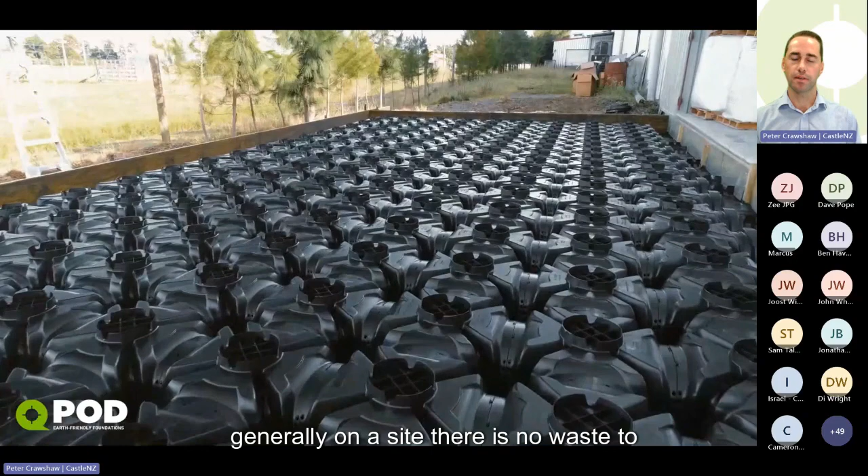So introducing QPOD, what it's all about. Essentially, it's a recycled plastic pod system, 100% recyclable, so generally on a site there is no waste to recycle. It's all components that can be reused. It's a fast install system.

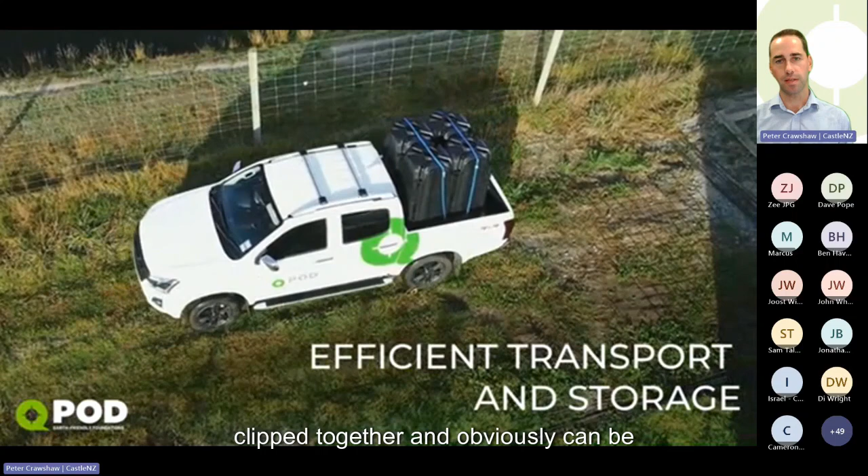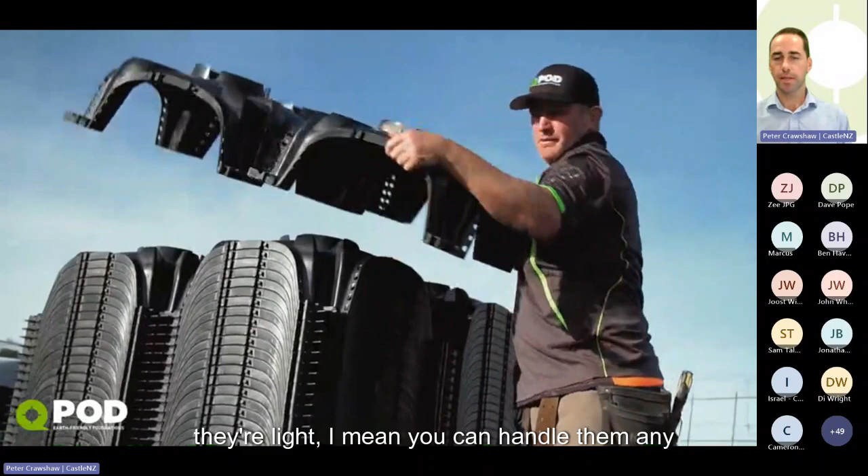It's all modular, clipped together, and can be transported on the back of a ute and trailer versus your typical truck and trailer of polystyrene pods, which is what we're really combating. They're light, you can handle them, any builders can put them down, homeowners have put these in. They come pre-assembled in a group of 4, so they pretty much mimic that of an 1100 polystyrene pod, and they just clip together in a modular lock together system.

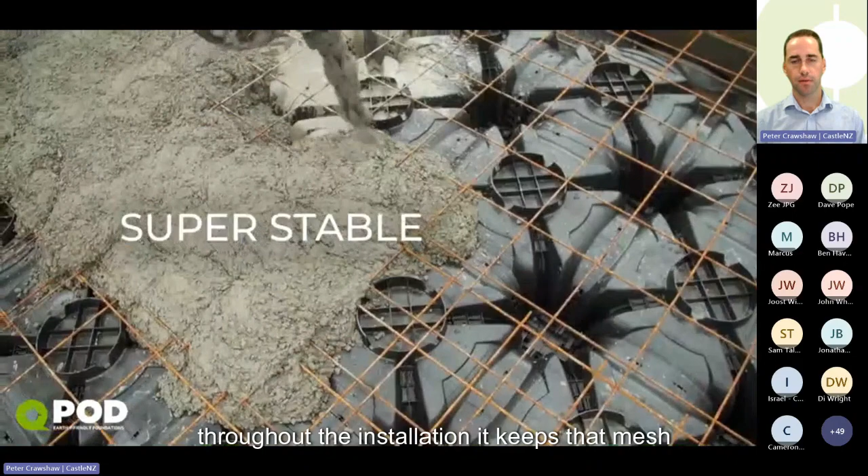Having a look at the mesh, we've got a mesh spacer built into the pod. This gives ultimate mesh placement throughout the installation, keeping that mesh at a really mint level. Essentially, you've got 4 bar chairs per pod, and the concrete pour is pretty self-explanatory.

So that's a little short overview on QPOD, what it's about, and why we're about it. Really, it's because of the polystyrene, and we want to give designers and installers an alternative. What is the problem with polystyrene? Well, the waste, and the delivery logistics, as I outlined earlier, as to the difference in logistics.

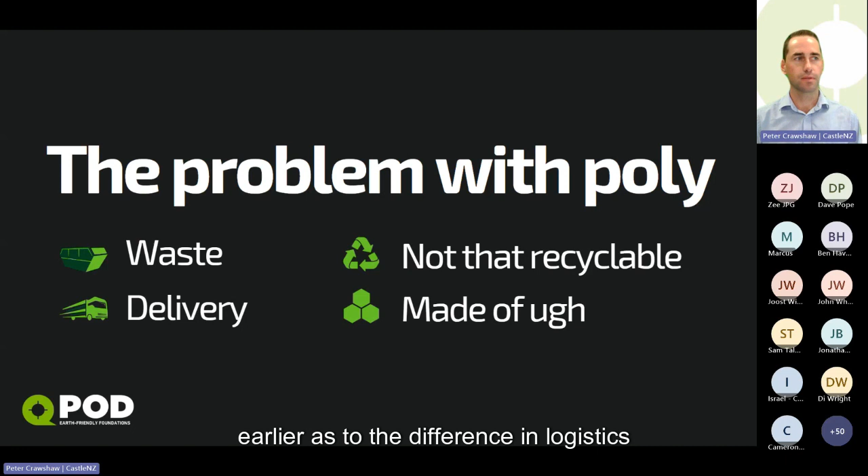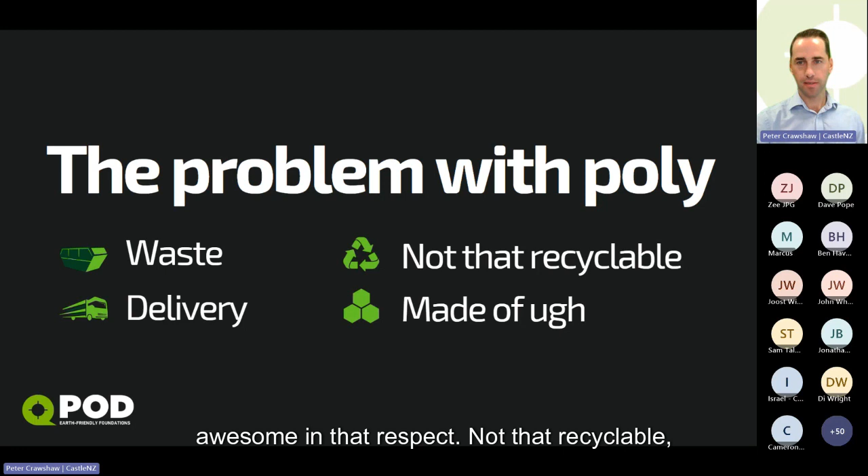You get 50 square meters of QPOD product on a pallet, so 3 or 4 pallets for a site and you're done. It's pretty awesome in that respect, not that recyclable poly. And what's it made of? That stuff that goes everywhere in the neighborhood when they're building.

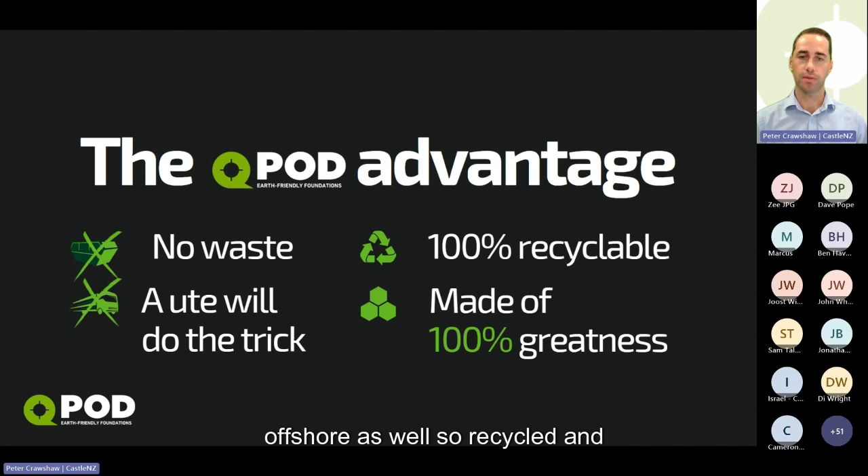We don't want it. Looking at the advantage of QPOD: no waste being a modular system, and a ute and trailer will do the trick instead of a typical truck and trailer of polystyrene pods. It's 100% recyclable and made of 100% recycled plastic as well, which we source locally here in New Zealand and some from offshore. So recycled and reprocessed, completely so.

Diving into configurations, I'll try to slow down so I'm not confusing everyone. The 2 configurations for QPOD are the raft system, which we're quite familiar with. That's typically got your ribs at 1200 centres and your mesh on top. This is the system we see around New Zealand, which swaps out the typical polystyrene pod installation we see.

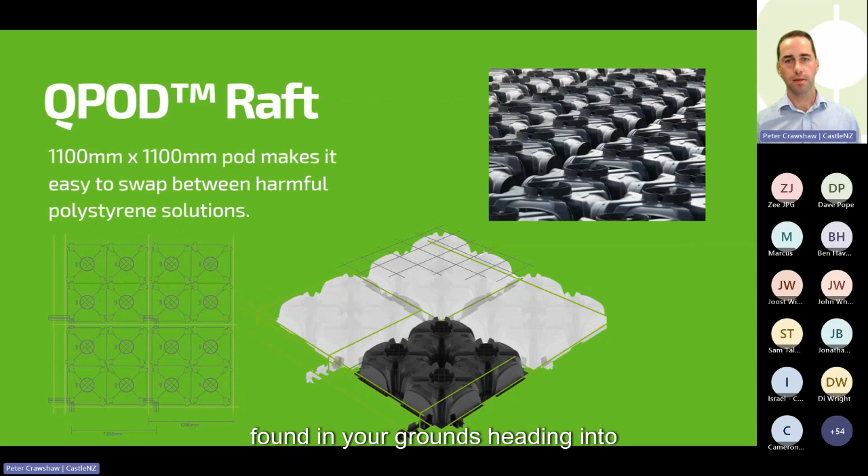The second configuration is QPOD continuous. This removes the ribs out of a raft system, and once we remove those ribs, you've got a massive saving in concrete and steel usages. So continuous performs on good ground essentially, or down to 200 kPa. It doesn't have the extensive performance of a raft slab, which is more typically found in your grounds heading into liquefaction or expansive grounds.

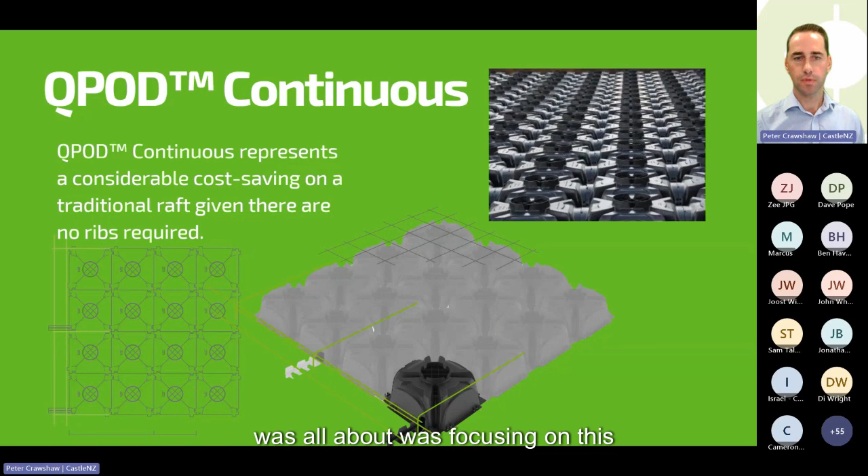So we talk more today about the continuous because that's really what the CodeMark was all about, focusing on this continuous system, which is a new one for us.

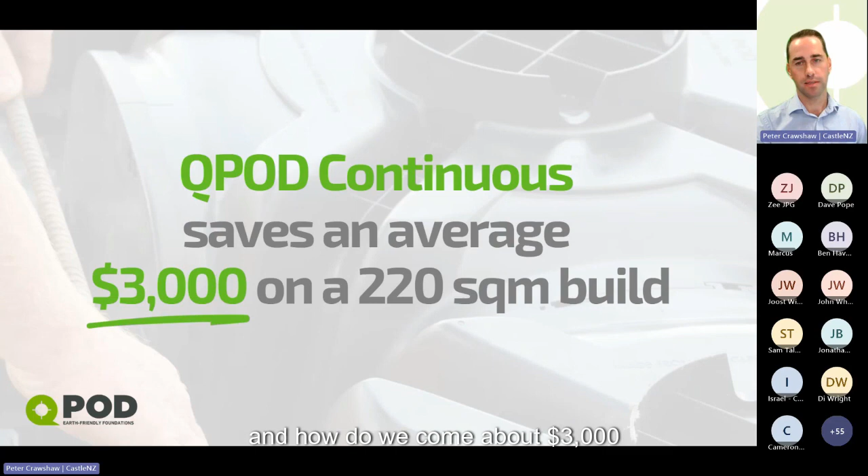So why continuous and how the cost savings, that's really what I wanted to share. So there are cost savings, and they equate to an average of $3,000 on an average 220 square meter build. And how do we come about $3,000? I will share that with you.

So with the ribs gone, we've got less steel, rib steel, we've got less concrete in those ribs. And then we've obviously opened the book there on concrete suppliers. We align ourselves with all the concrete suppliers of New Zealand who supply certified concrete. That really gives you, designers and builders, the opportunity to flex with your supplier that works best for you, the one that supports you the most, the one that delivers your concrete on time.

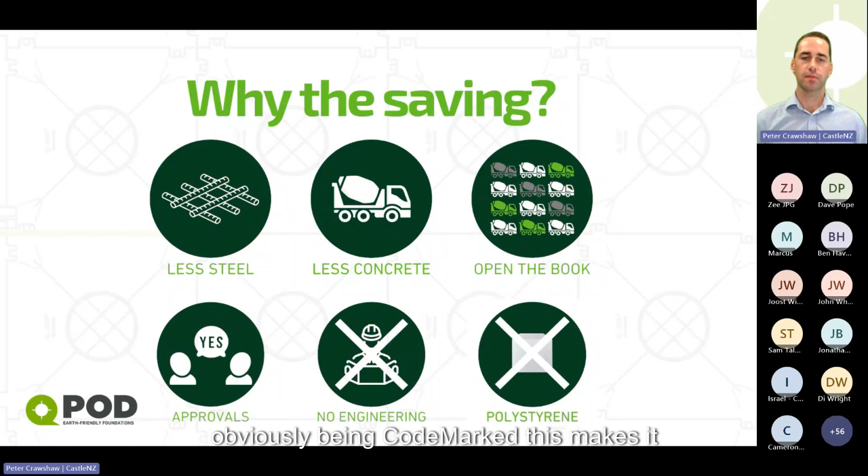Approvals, obviously being CodeMarked, this makes it very easy for approvals. The council can inspect these slabs, doesn't require engineering. So submit your design with a CodeMark certificate, and that's suitable for submission to council. No engineering, no polystyrene. Bring it on.

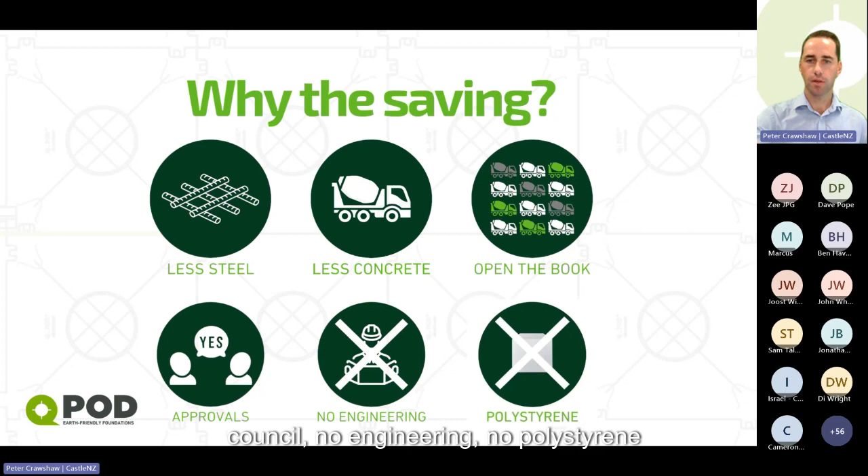QPOD CodeMark. So this CodeMark was a busy little project of ours for the last 6 months, and I'll extend it out to a year, getting this to fruition. We did that with GlobalMark in Australia. They were a recognised division in working out code marks. So we're excited to get this a couple of weeks ago. We posted up a few blogs online, and our raving fans joined us in celebrating that. So I hope we've got a few more today to join us.

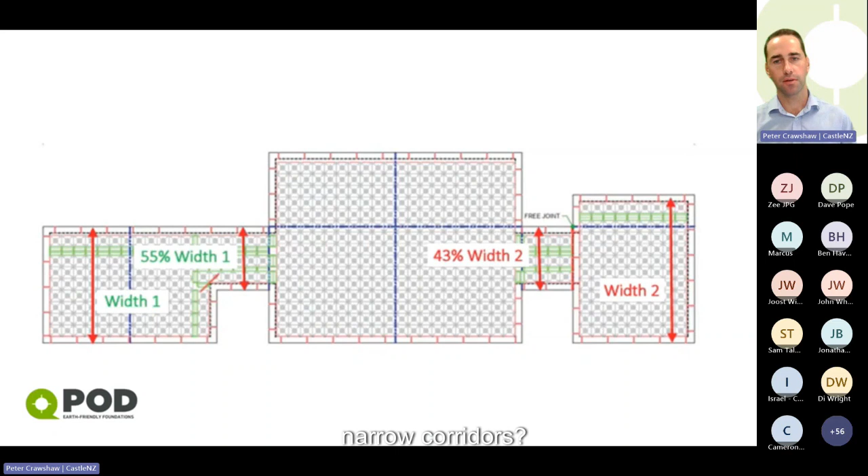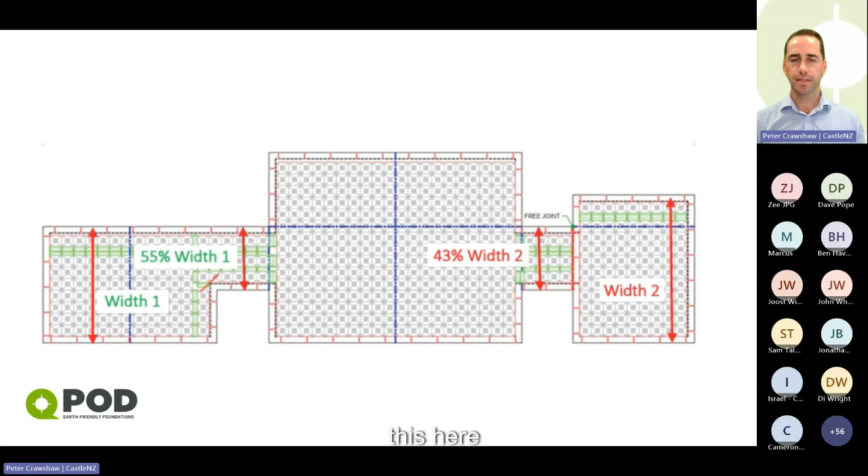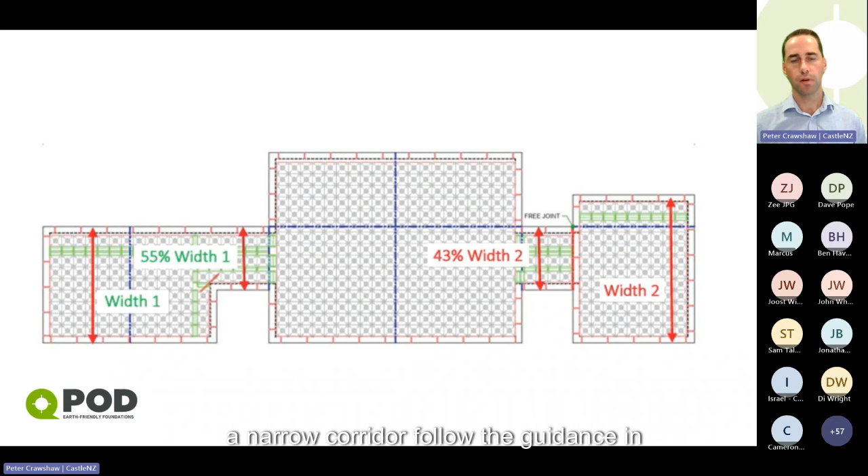This here was pushing a lot of designs outside of CodeMark, which was disturbing for us. So in our CodeMark, we included this. So narrow corridors, no longer a problem. We just gave some guidance around when to put a free joint in and what that free joint looks like. So when you've got a narrow corridor, follow the guidance in the manual, put a free joint in if it's required. Covered.

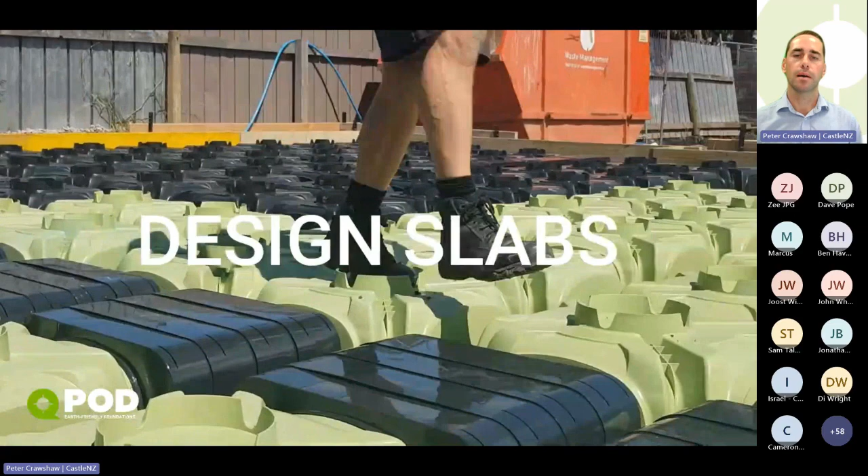To any length, design slabs to any length. So there was a limitation around lengths of slabs or sizes. So with the QPOD CodeMark, there is no limitation on lengths. There again, just some guidance around when to put a free joint in. So you know, within every 30 meters lineal, you'll need to put a free joint in, and all that guidance is in our design manual.

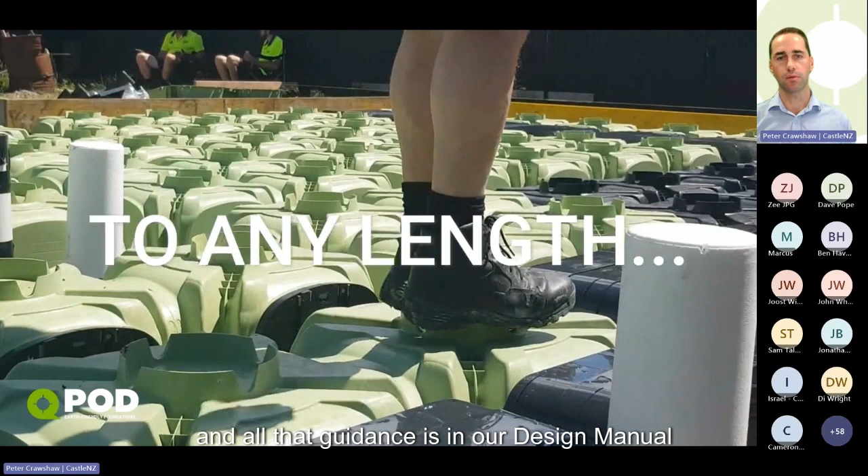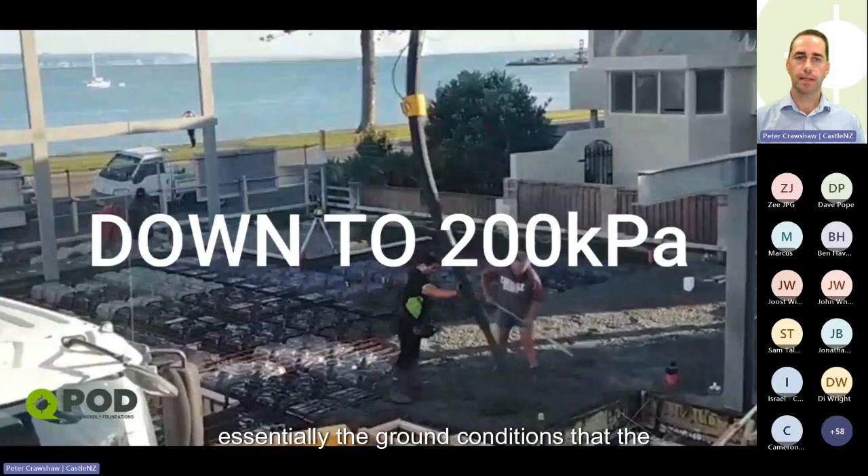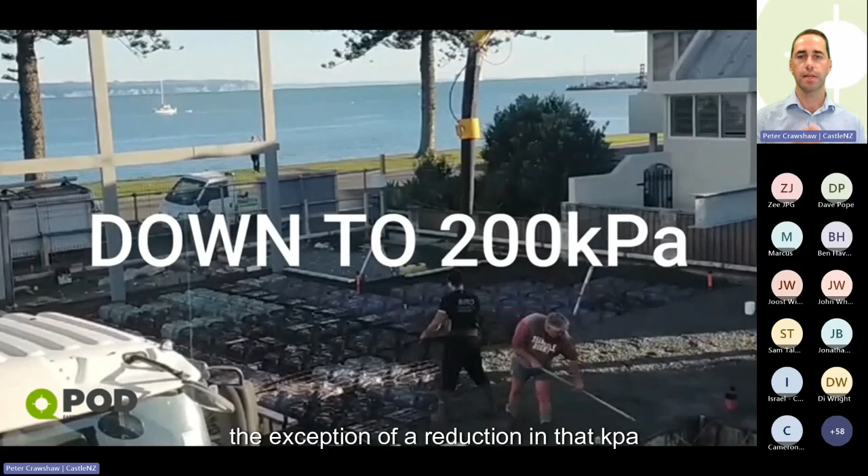QPOD performs down to 200 kPa. So essentially, the ground conditions that the CodeMark QPOD performs in is down to 200 kPa, or generally good ground conditions, with the exception of a reduction in that kPa. So with the continuous design, the pods are suitable down to 200. So that does flex it a little bit, with us struggling to find 300 kPa ground in New Zealand, which the good ground defines. So there's a little bit of flex there.

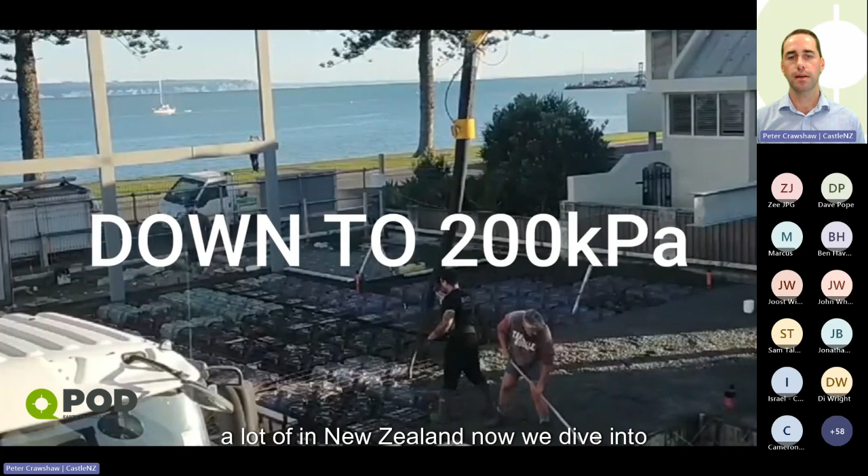When we head into liquefaction and expansivity issues, which is a lot of in New Zealand now, we dive into the raft system and obviously SED. So more on that later.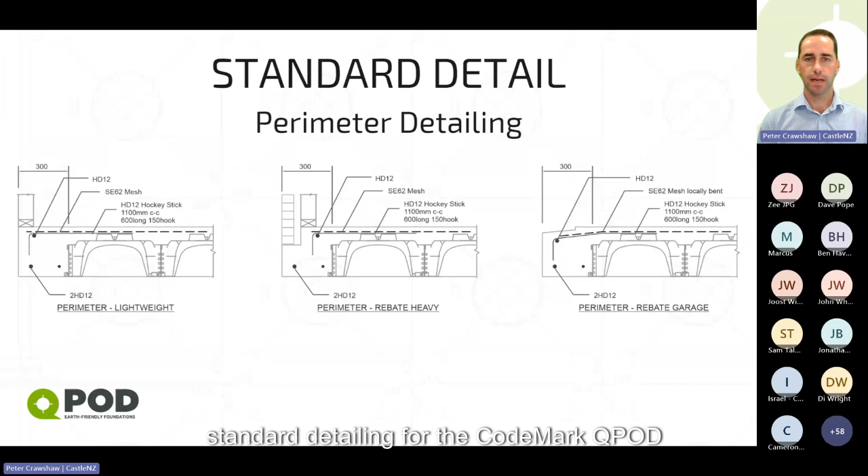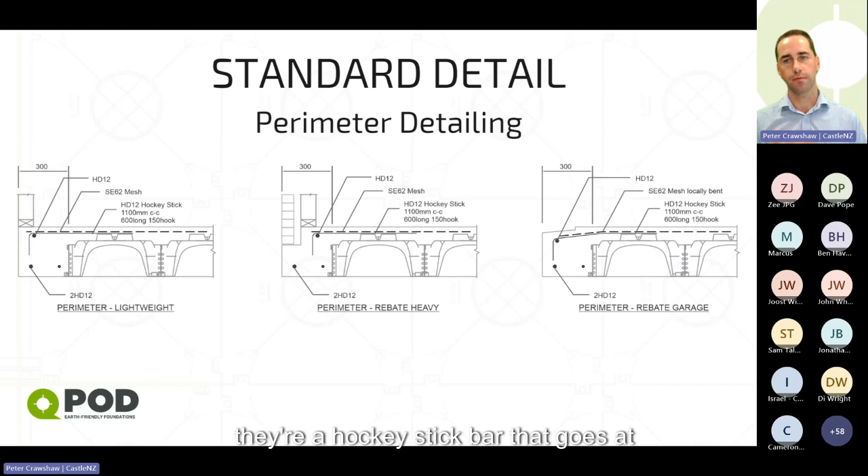Standard detailing for the CodeMark QPOD, typical to what you'd normally see, apart from no ribs, they're gone. So we've got our mesh on the top, SE62 mesh. We've got our typical 3 perimeter bars of HD12, and our hockey stick bars or bent bars on the perimeter. These are essentially your starter bars, which is what they once were in the 3604. They're a hockey stick bar that goes at every second pod, or 1100 centers along the perimeter. This just ties your perimeter foundation into your topping.

You see some standard details there for standard lightweight claddings, brick rebate claddings, and a garage rebate. Obviously, we've got a full suite of standard details we can share with you. You can download off the webpage anytime you like.

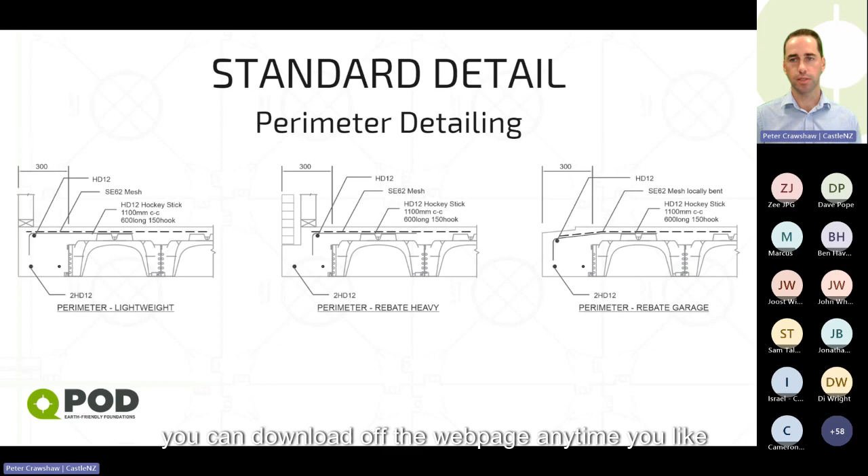Provisions for insulation. This is a common question today. Yes, our CodeMark covers provision for insulation. Some don't, and I'm sure they're busily working on that. But under slab insulation, tick. Side insulation, tick. So we generally work with XPS under slab, reason being it performs the best in compression and R value. And thirdly, it doesn't make a hang of a mess on site when you're cutting it like the EPS does. So we recommend that for our insulation, either under slab or side, a combo of both or one or the other. We work with a lot of suppliers on that.

Support tools for you. We've got standard detailing, which I mentioned. This is all downloadable off our website, you can grab that whenever you like. There's also a material calculator, which you can find on the website too.

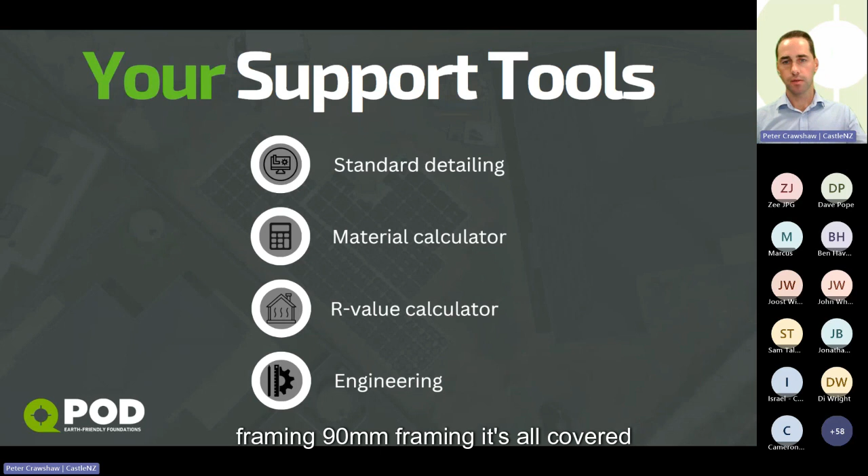If you put in your lineal meters and square meters, it will spit out estimated components required, steel required, and concrete required. Likewise, our R value calculators are awesome too, looking at our different insulation options: under slab, side insulations, brick and lightweight claddings, 140mm framing, 90mm framing, it's all covered. Type in those variants, put in your meter squared and lineal meters, and it will give you some options to choose and download for compliance.

Engineering - when things fall outside the CodeMark, we can engineer, and generally that's heading towards the raft design again. So raft design is still there, still readily available, and we're putting down lots of raft slabs every day, because our ground conditions do demand that.

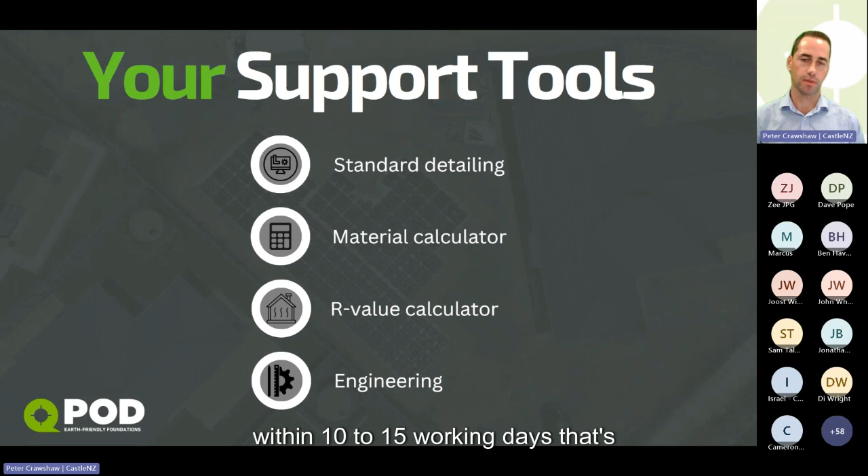Obviously any engineer can take up QPOD and engineer it. We do also offer an engineering service in-house and have done for some time. This is really to make life easier for you designers to take up QPOD. If it's outside CodeMark, talk to QPOD, they'll make it easier about engineering as well - we'll take that hassle off you and deliver an engineered design in 10 to 15 working days, typically what we're working with.

So, Q&A - that really brings us to the end of our brief overview. We wanted to be nice and succinct today, and give you something to think about and something to take away. But if there's Q&As through the session, Sam, is there some come in?

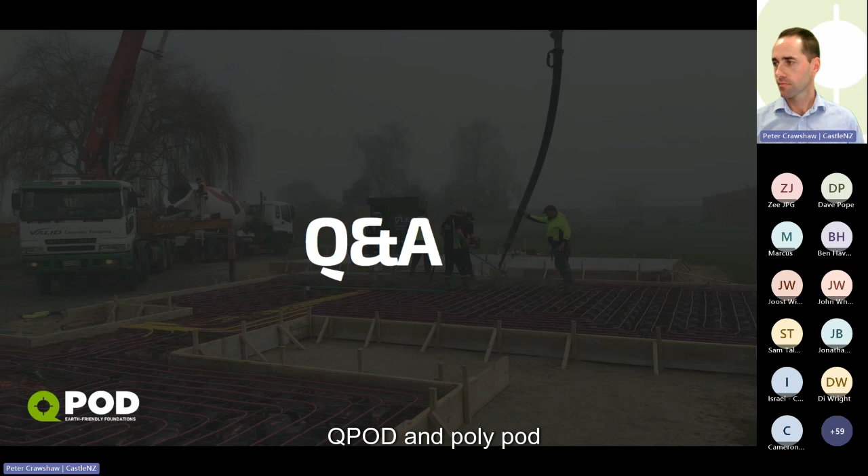Sure, yeah. So one from Ben here: what is the difference in R value between QPOD and polypod? Great question. The difference between the two is very negligible.

Polystyrene does perform slightly better just in terms of the way it's shaped in the pod, in the floor. But then when you look at the heat loss in the perimeter, that's where a lot of the action happens. So as soon as you put under slab insulation in or side insulation in, it quickly lifts both QPOD and polystyrene pods up to very similar values. There is a slight difference in the values - I'm not going to hide that - it's very slight, but it's negligible. And on our calculators, if you poke in your area meter squared and lineal meters, it'll give you exactly your R values for different scenarios.

Cool, great question. Just another question from Dave here: bottom plate fixing for HardieBrace. Yeah, that's probably a question I can't answer in great detail here, because it's just dependent on the supplier specifications.

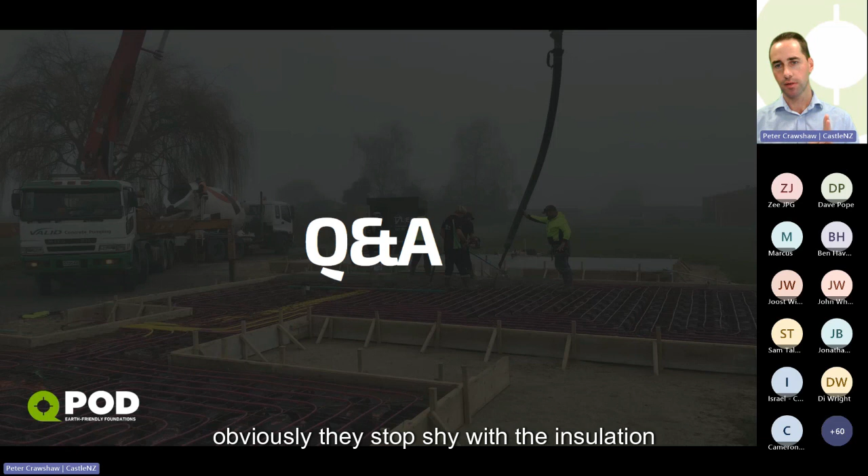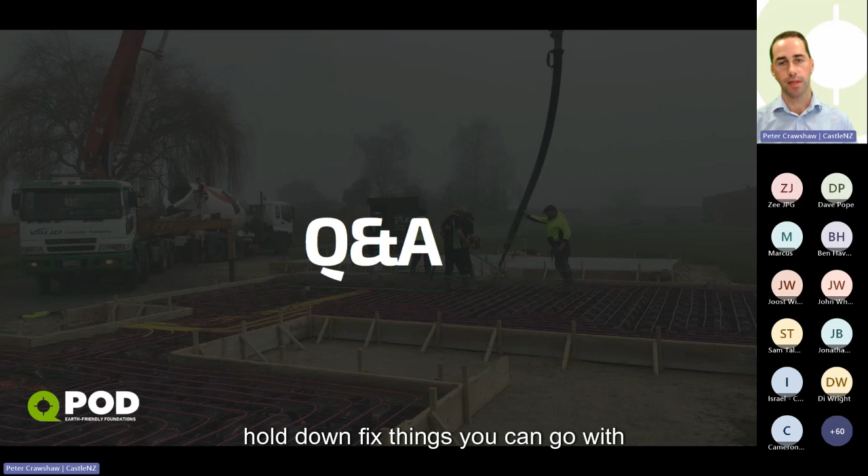But often these questions are asked with side insulation in mind, and getting the hold down bolt sufficient holding. There are some systems out there which you can put on the side of the slab, or they stop shy with the insulation some of the way up. Quick Edge is one I know that does that really well - they've got their quick set taper, which stops shy at the top, meaning you don't need any particular difference in angles or particular hold down fixings. You can go with standard hold down fixings with them. So it's probably something I'll need to dive into a bit more detail and respond directly on that one.

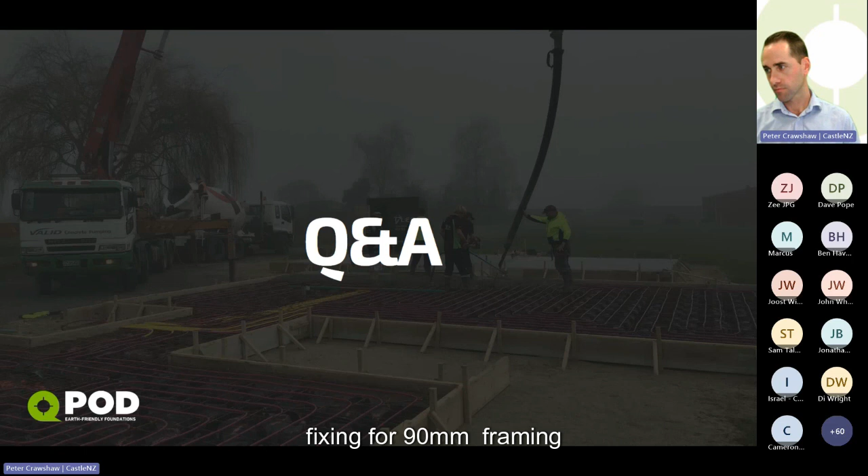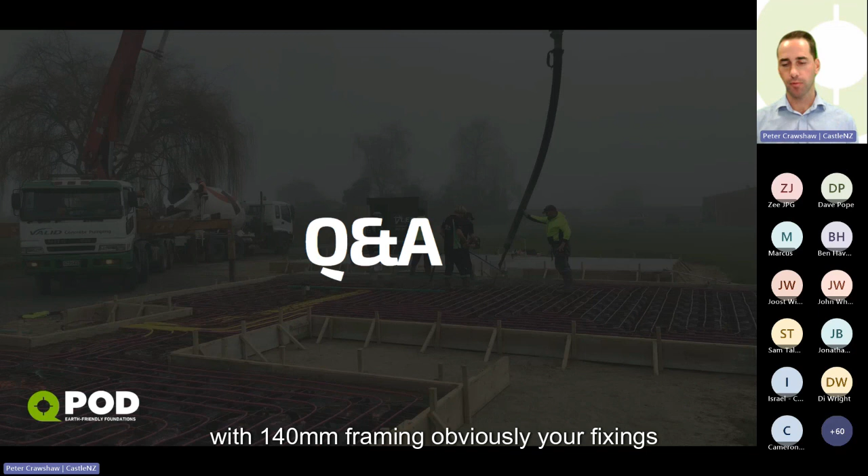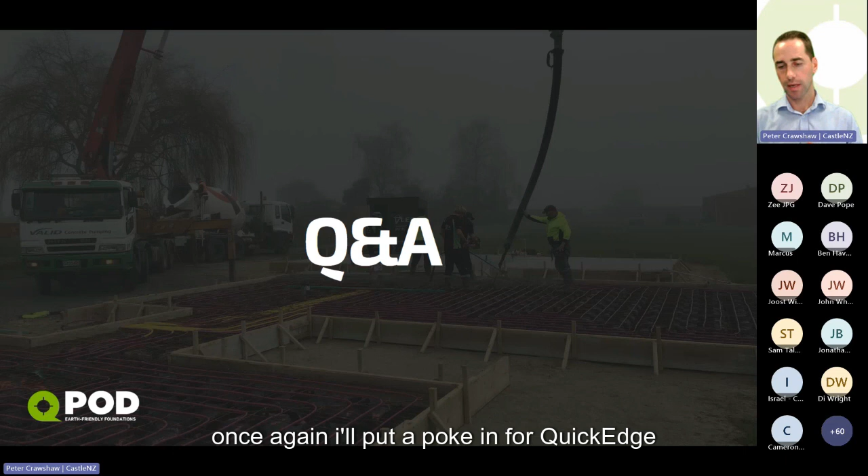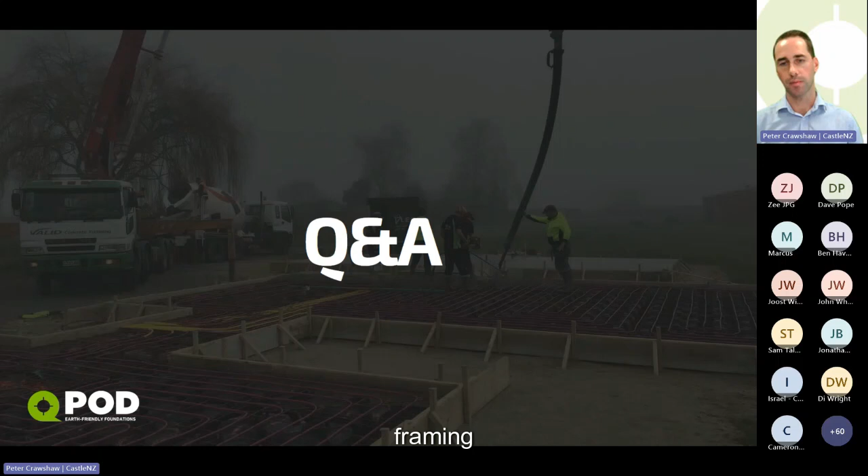Great question. Another question from Marcus here: edge insulation effects on bottom plate fixing for 90mm framing. Kind of covered off in my last answer, which you probably picked up - yeah, that is a challenge. With 140mm framing, obviously your fixings are back. With 90mm framing, your fixings are quite close to the edge, and hence insulation either has to stop shy or go on the outside. Once again, I'll put a poke in for QuickEdge - they do a great system which stops shy of the bolt fixing, so you don't need to change any of your fixings for 90mm framing. More info on QuickEdge I can send through, and there are other suppliers out there too combating the same issue.

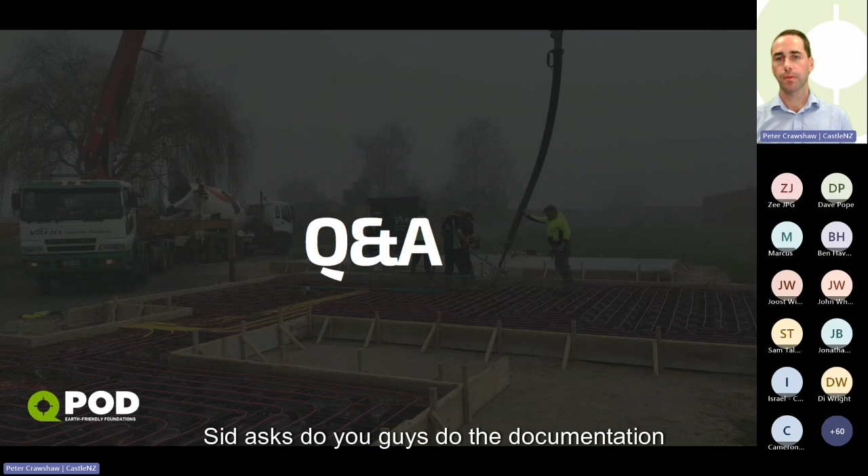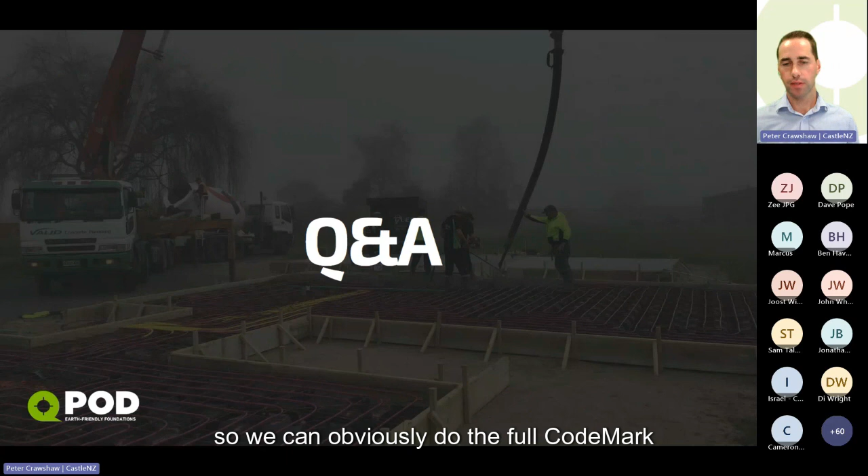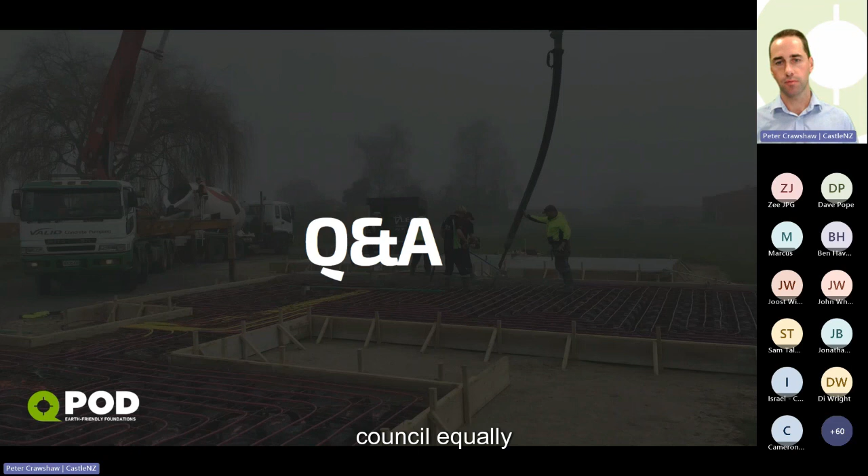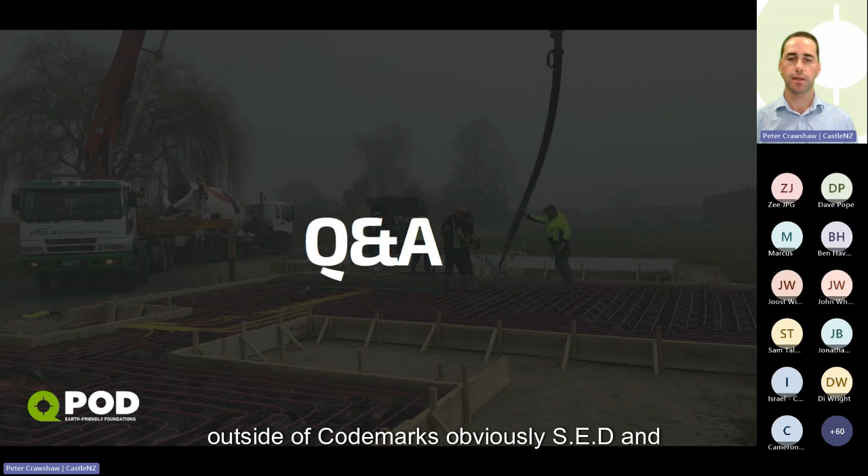Sid asks, do you guys do the documentation? What drawing should the architect provide? Documentation for a slab design, great question. So we can obviously do the full CodeMark foundation design - we would present that back to yourselves with a CodeMark certificate, which can be lodged for council. Equally, you guys can draw it yourself, pull in the standard detail, add the certificate, submit to council - that's for jobs within CodeMark. Outside of CodeMark, it's SED, and that's when an engineer gets involved, delivers their PS1, and submits to council. So presuming you're speaking about CodeMark, yes - you can design, or we can design, job done with the certificate.

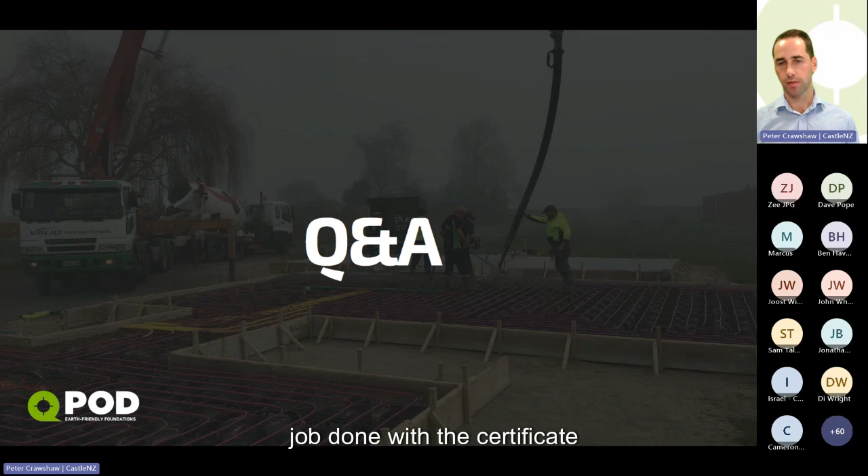Good, other questions? Stu asks: the drainage under pods or into fill below, your preference?

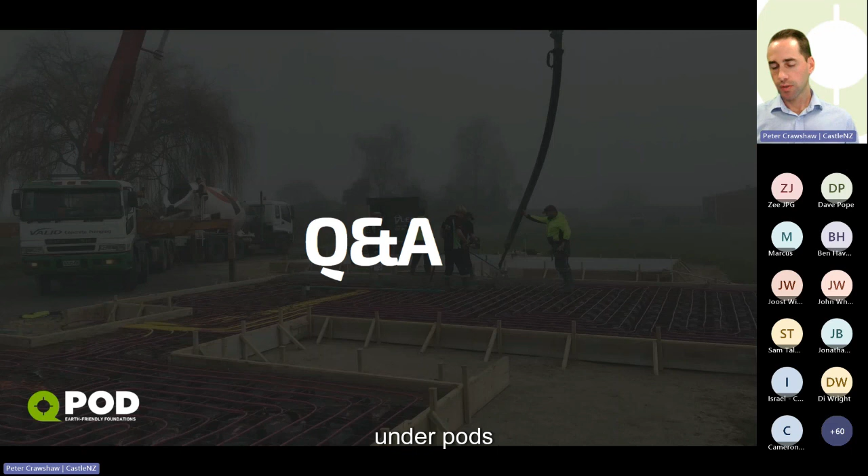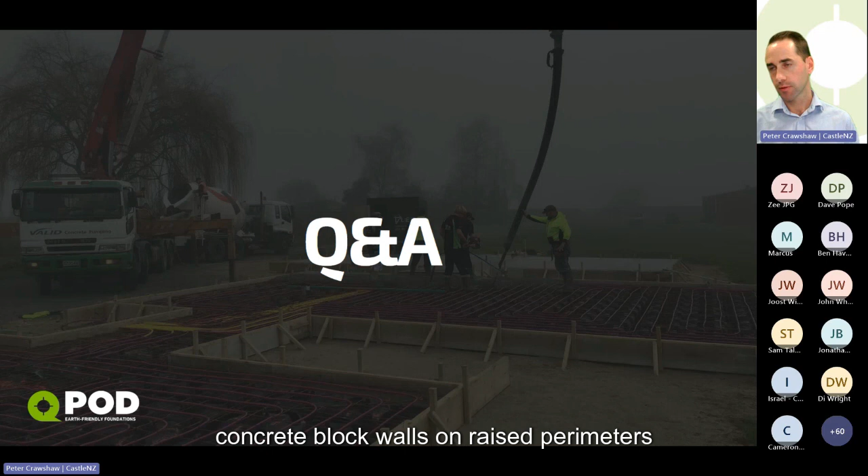Drainage under pods or into fill? Our preference - challenging question, that one. I'm just trying to get the context of it. Drainage - I'm thinking, is this beside concrete block walls on raised perimeters, or drainage of waste within the slab?

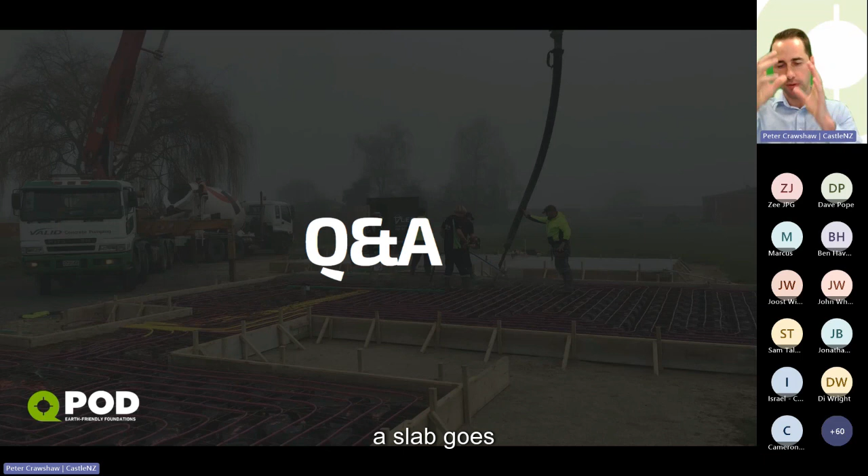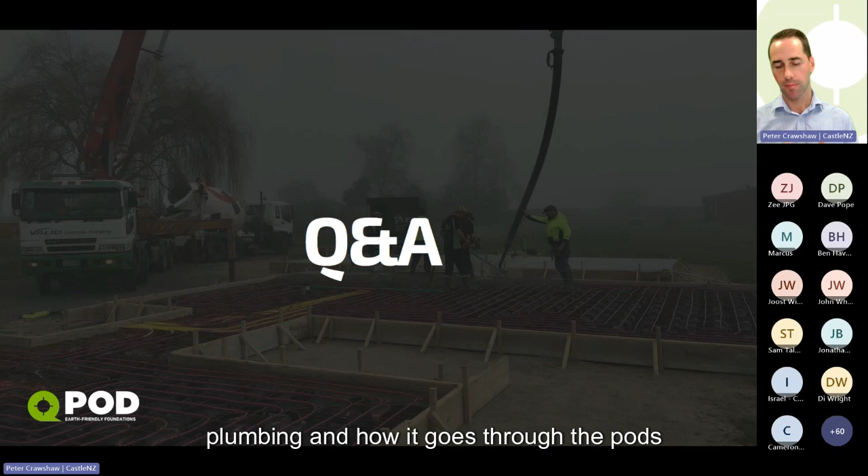So typical plumbing in a slab goes through the foundation and into the footing. It can also go through the slab itself. Obviously there's two standards around plumbing and how it goes through the pods. Typically we work with just the vertical penetrations where the plumbing is done prior to pods getting installed. I'm not sure if I've covered that one properly, so I'll look into it after this and see if I can cover it off better.

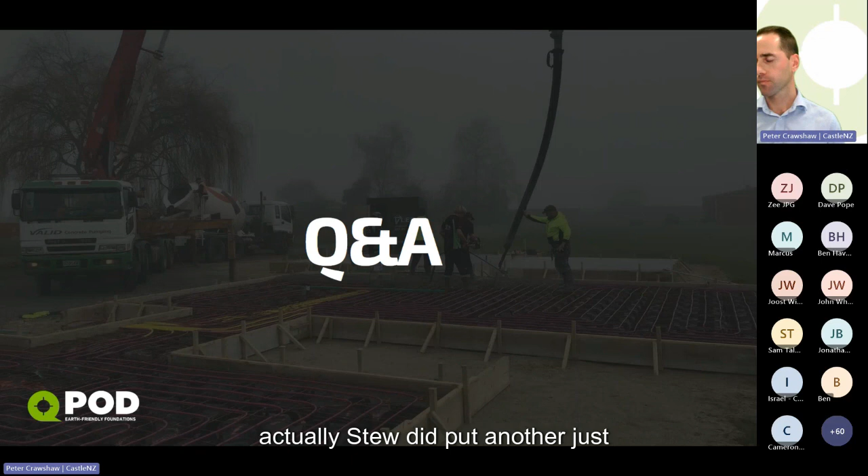Stu put another comment here about drainage of waste - so the waste pipes going out. Like I mentioned, the waste pipes typically go straight through the pods into the compacted fill and out the side. With the standards brought in post-Christchurch earthquakes, they can be done within the slab too. So it can be done both ways.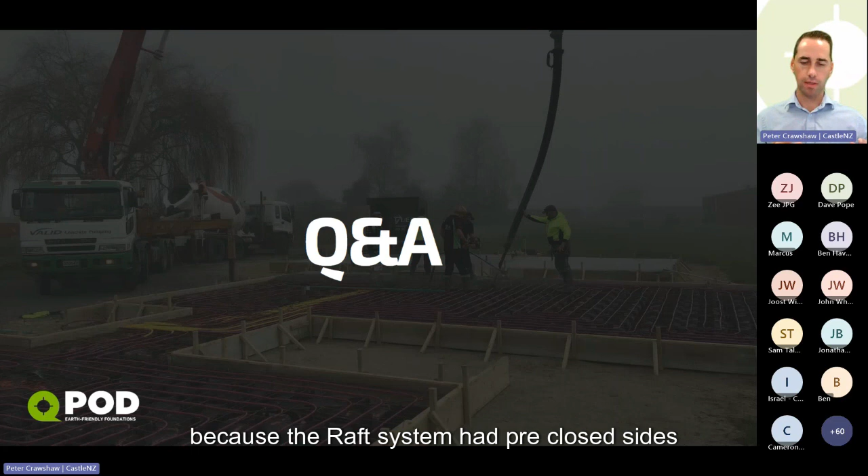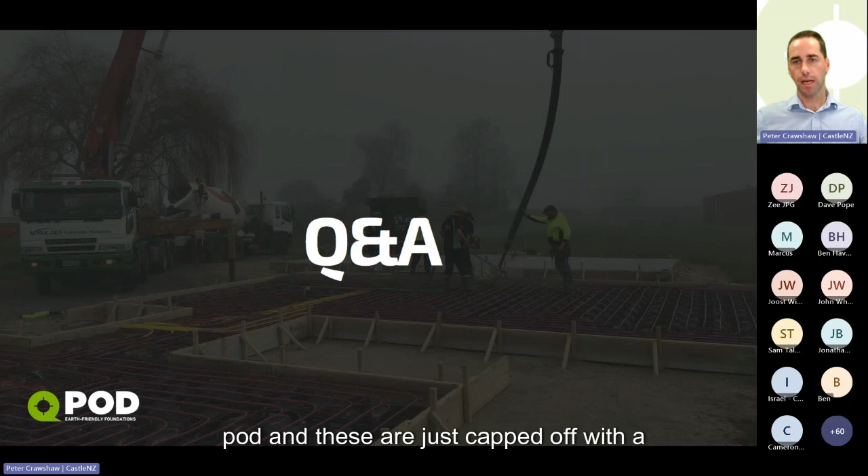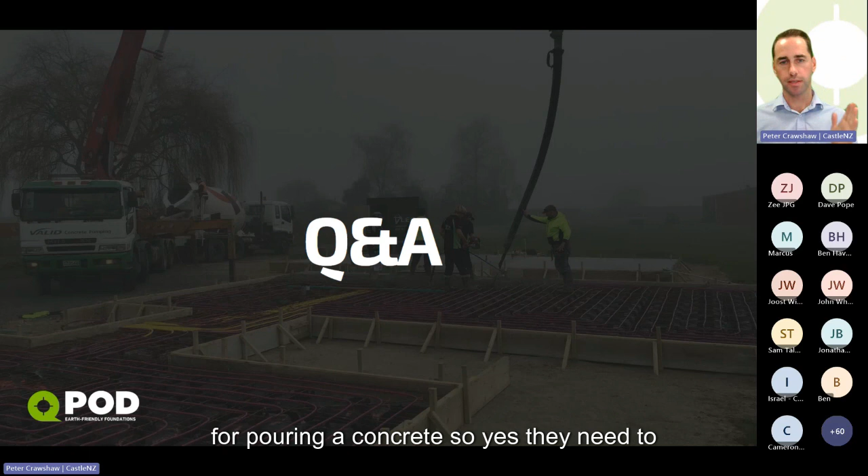Next question from Cameron: in the continuous system, is the edge pod supplied with a closed side, or do we need to clip end caps on these? So a question around the continuous system and variation in pod types. Because the raft system had pre-closed sides, the continuous system has open sides, as you might have seen in the video, and they couple together one after the other. When it reaches the edge, you have an open side of a pod, and these are just capped off with a QPOD cap. These caps lock on like a deadlock, so it can't come off again - really stable for pouring your concrete. So yes, they need to be capped off, and that all comes provided with the pods.

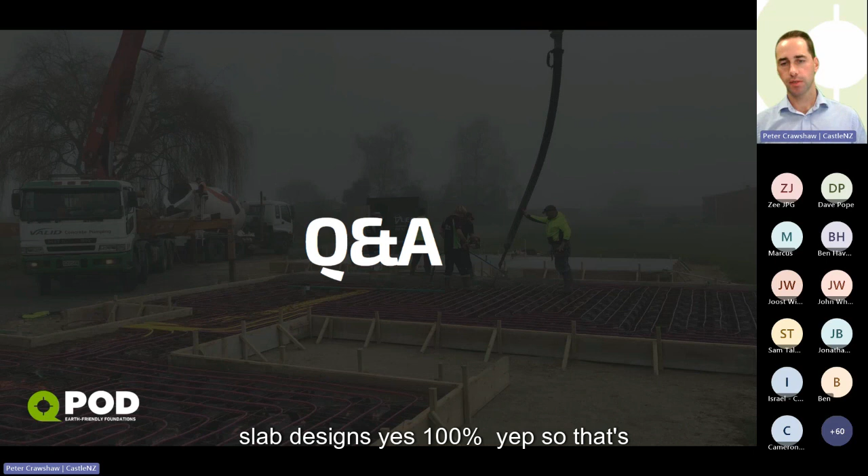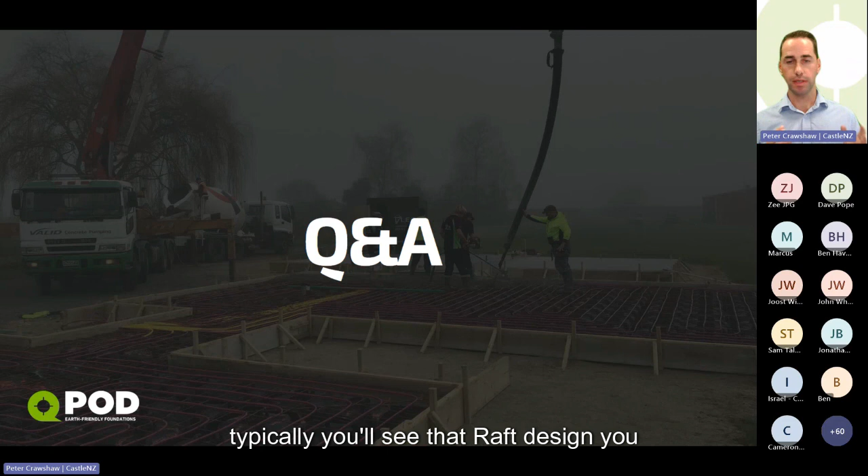A question here from Jason: does the raft design comply with TC2 slab designs? Yes, 100%. That's when we go into SED territory - we do a lot of TC2 designs every week. Typically with that raft design you'll see some more steel in the perimeter and the ribs, and possibly starting to verge on adding fiber to the concrete as well. So we've got plenty of TC2 options, and engineers have different takes on how to do this - we have ours as well.

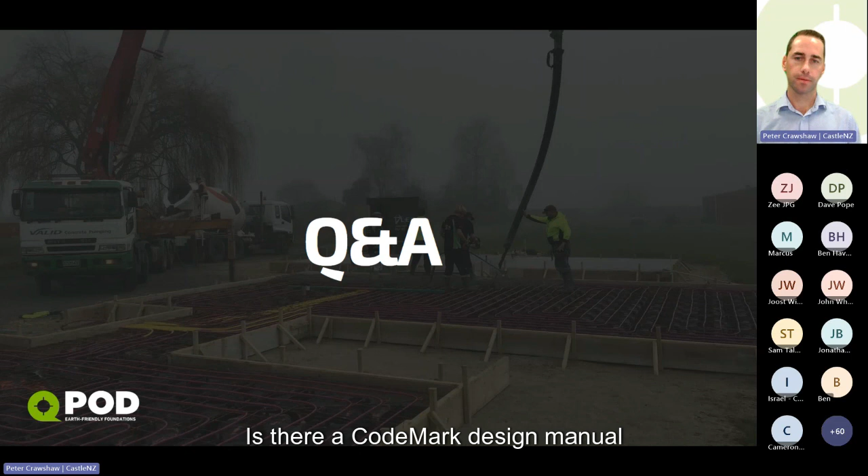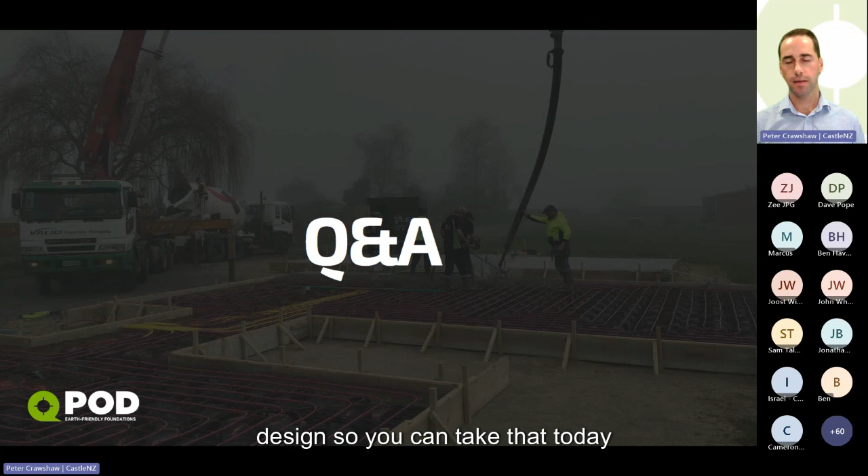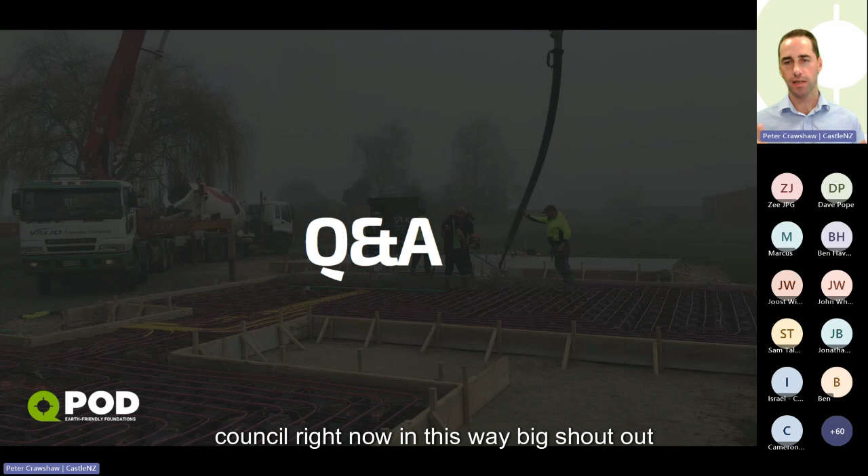Another question: is there a CodeMark design manual available so designers and engineers can draw your system and comply with CodeMark? Yep, so we've got a really easy landing page right now, which Sam our marketing man set up - it's brilliant, it's got everything you need on it. It's got the design manual to follow, the CodeMark certificate to submit with council, and the standard detailing to apply to your design. So you can take that today, poke it into a design, and submit it to council today. Big shout out to some on the call today who have already got CodeMark designs into council and getting processed right now - big shout out to you, Origin Homes, love you guys.